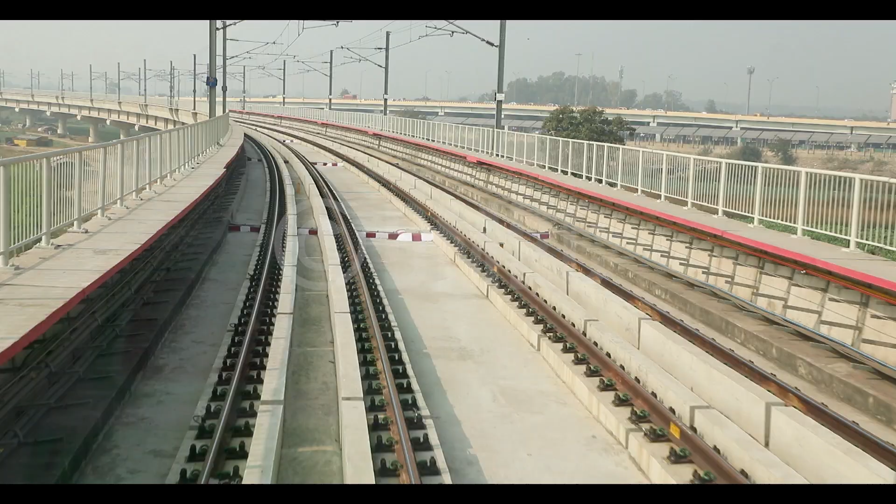Country's capital, nation's pride. Its regal past, its cosmopolitan presence, world-class ways, leisure and comfort, style and elegance. We know, we care, we are Delhi Metro.

Delhi Metro, which commenced operations in 2002, is regarded as one of the most successful urban transport systems in the world. DMRC has gained reputation as an efficient metro system developer and operator for actively playing the role of consultant for many national and international metro projects.

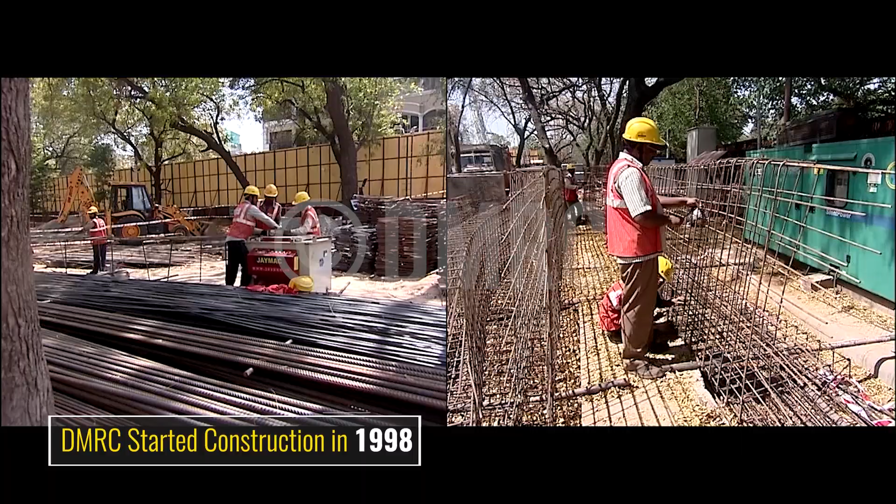Phase 1 and Phase 2 of Delhi Metro has laid the foundation of a robust mass rapid transit system in the capital, connecting all four corners of the city and a large part of NCR. The Delhi Metro started construction in 1998. The first elevated section with one line running between Shahdara and Tis Hazari on Red Line opened in 2002.

Today, it stands as the largest metro system in India, operating 12 lines covering 389 kilometers and 285 stations. This is a commendable achievement. Today, Phase 3 expansion has brought Delhi Metro on the world map and became an incredible tale of time, which has been successful in providing quality service.

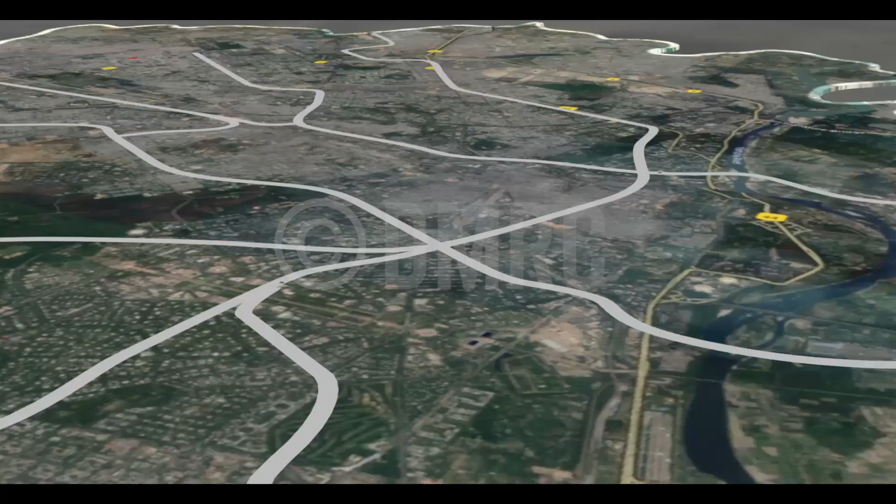Phase 3 has connected the linear corridors of the earlier phases and made the metro accessible to most of the major localities of the city and NCR as a whole. It was the toughest so far in terms of engineering challenges. It involved work on 11 different corridors with 30 mammoth tunnel boring machines and a workforce of nearly 30,000.

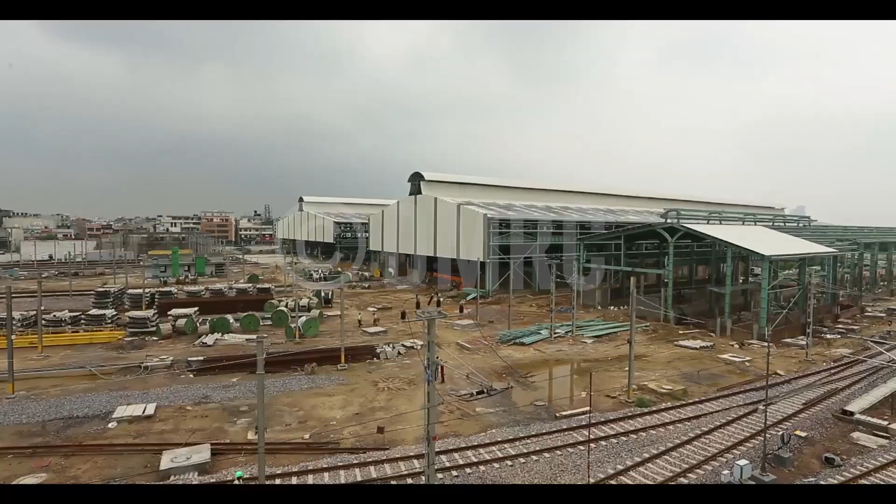Work on Delhi Metro's Phase 3 project started in 2011. It was one of the most challenging infrastructure development projects anywhere in the contemporary world. For Phase 3, DMRC not only had to dig through rocky terrain, pass through thickly populated areas and cross over flyovers, underpasses and railway tracks, but also cross the hurdle of its own existing elevated network.

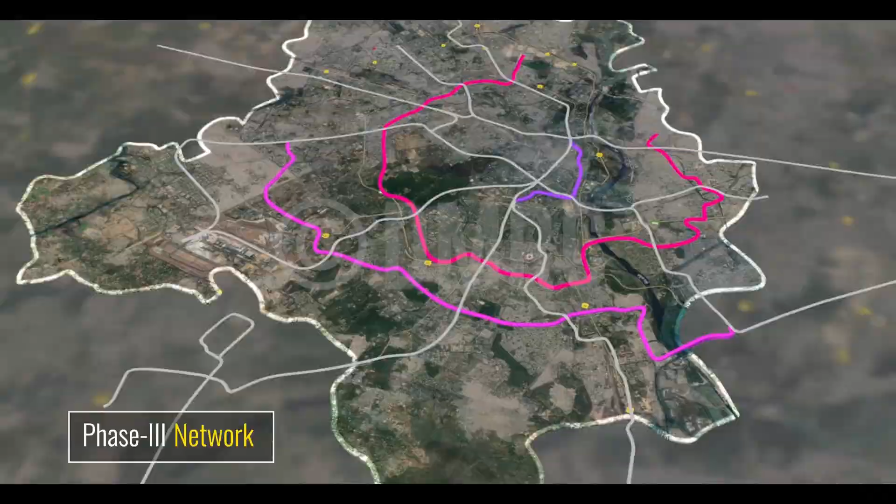Major civil engineering challenges that were encountered during the construction of the third phase of expansion were on these three corridors: Central Secretariat to Kashmiri Gate, Violet Line; Janakpuri West to Botanical Garden, Magenta Line; and Majlis Park to Shiv Vihar, the Pink Line.

Violet Line, or the Heritage Line, corridor of Phase 3 is an extension of Line 6 from Central Secretariat to Badarpur, with interchange facilities at Mandi House Station for Line 3 and Kashmiri Gate Station for Line 1 and Line 2. The Kashmiri Gate Metro Station is the interchange station connecting Violet Line with Red and Yellow Lines of the network. Central Secretariat to Kashmiri Gate corridor was one of the first corridors of Phase 3 on which work began in May 2011, and it is a completely underground section.

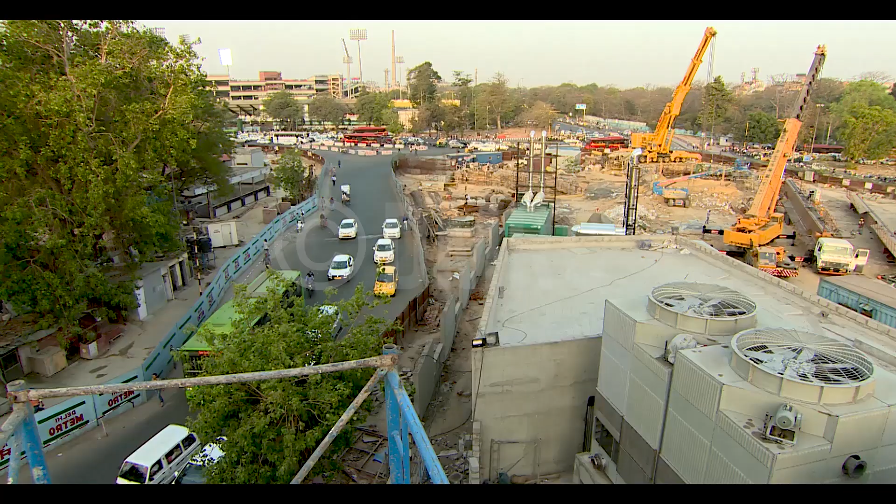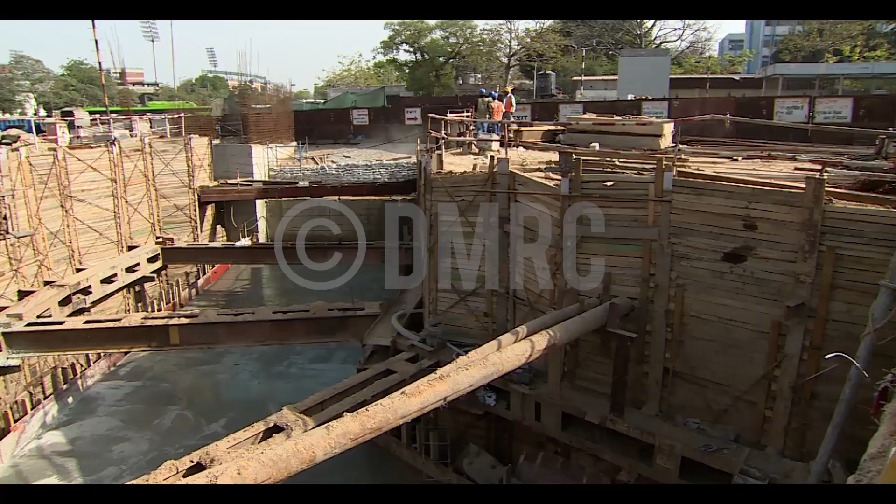As soon as construction work started on Heritage Line, many complexities surfaced which tested the abilities of engineers. But the DMRC engineers were prepared to tackle them one after another. The engineers encountered their first challenge on the ITO Delhi Gate section. It was the presence of the 16th century historical monument Khuni Darwaza, constructed by Sher Shah Suri, the then ruler of Delhi. On the ITO Delhi Gate section, construction was underway in full swing, and DMRC was strictly following the guidelines prescribed by the National Monuments Authority, as the monument was in close proximity of the construction area.

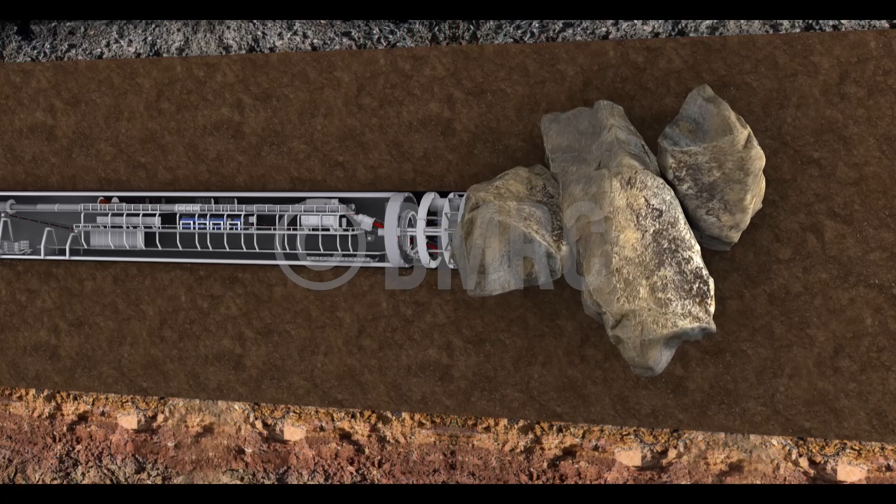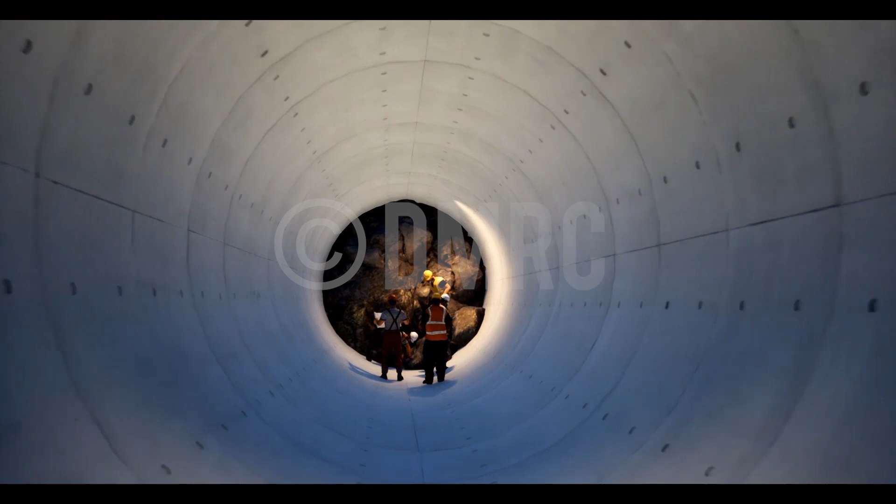Here, the TBM on the upline encountered hard rock, and it stopped as the TBM was originally designed for soft soil. Presence of such hard rock was not anticipated here. Now, it was time for the engineers to explore other solutions to overcome the situation. DMRC then employed a pipe pushing technique. In this technique, 2 pipes of 1800 dia each were inserted from the Delhi Gate shaft towards the stuck TBM. Construction workers were sent through these pipes inside the tunnel to break away the rock slowly and make way for the TBM to move forward.

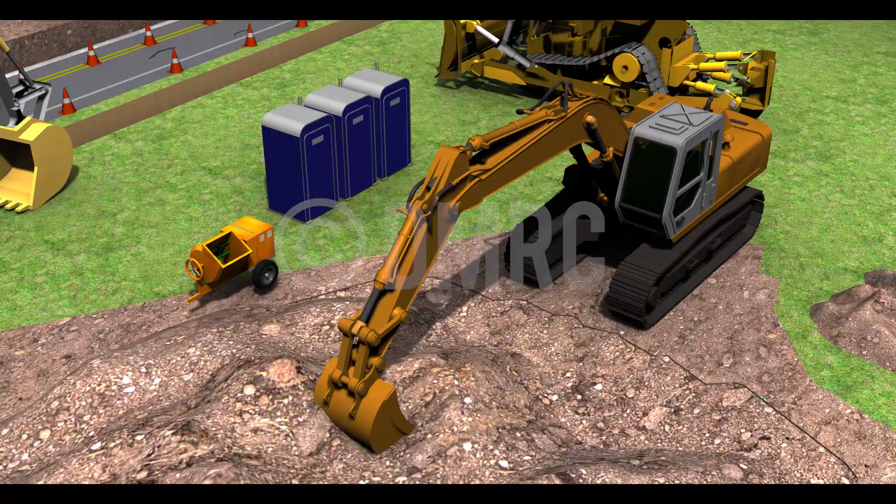Given the challenges it posed to DMRC engineers, the Delhi Gate Jama Masjid section can be called the stretch of challenges. As work proceeded on this stretch, DMRC engineers were welcomed by a major hurdle in the very beginning. On 6th July 2012, while digging earth in the Netaji Subhash Park area to construct a metro station, DMRC came across remains of some medieval era construction buried under the ground. The discovery triggered excitement among local residents, who believed the remains to belong to Akbarabadi Masjid.

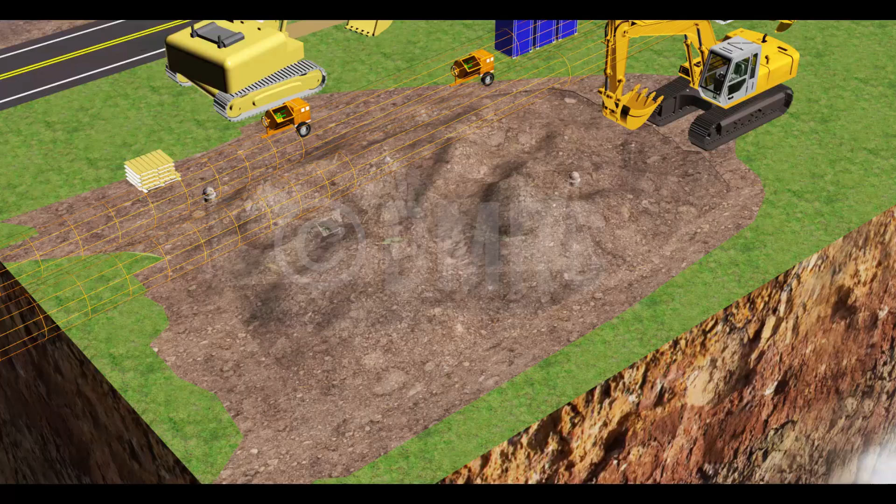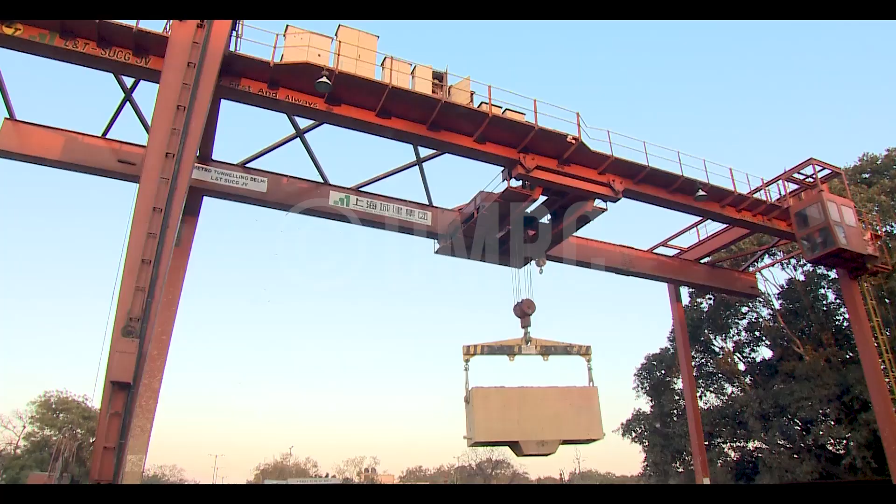Now DMRC had to fight another battle due to the change of alignment, which led to many changes in a very crucial time. The alignment had now to be shifted under the busy Netaji Subhash Marg, and a major portion of the tunnels were to be dug beneath the densely populated residential area of Daryaganj.

Shifting the alignment caused numerous unwanted problems, as the earlier alignment was passing under a non-residential stretch of open space. DMRC engineers did not have access to the ground because the area was densely populated and housed very old buildings and structures, mostly in dilapidated conditions.

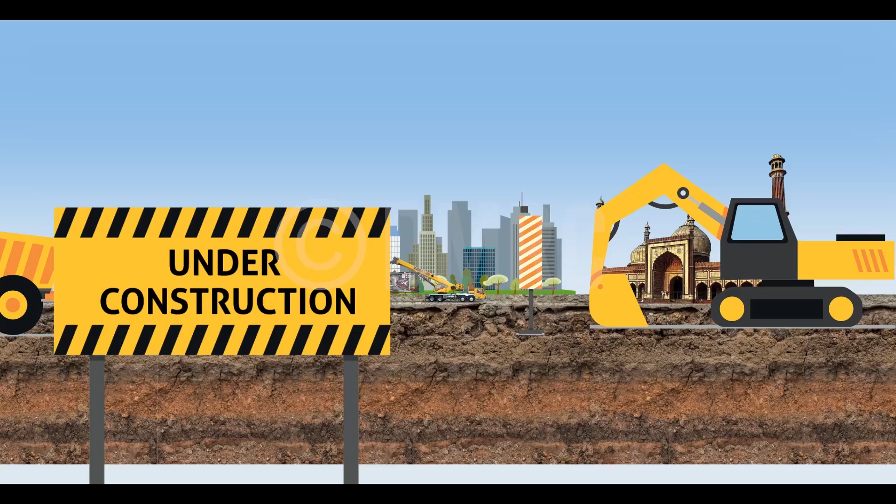The Delhi Gate Jama Masjid stretch is not only known for challenges but also for extraordinary feats. One such feat was achieved when the complete TBM assembly was done at one go inside the tunnel for the upline. It was a 96 meters long, completely assembled underground tunnel boring machine or TBM. This was the longest TBM ever used in the Delhi Metro project and weighed approximately 500 tons.

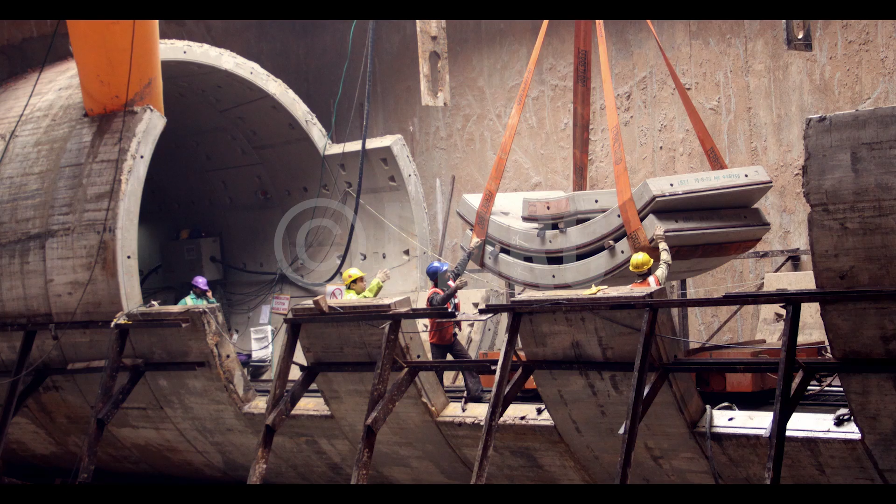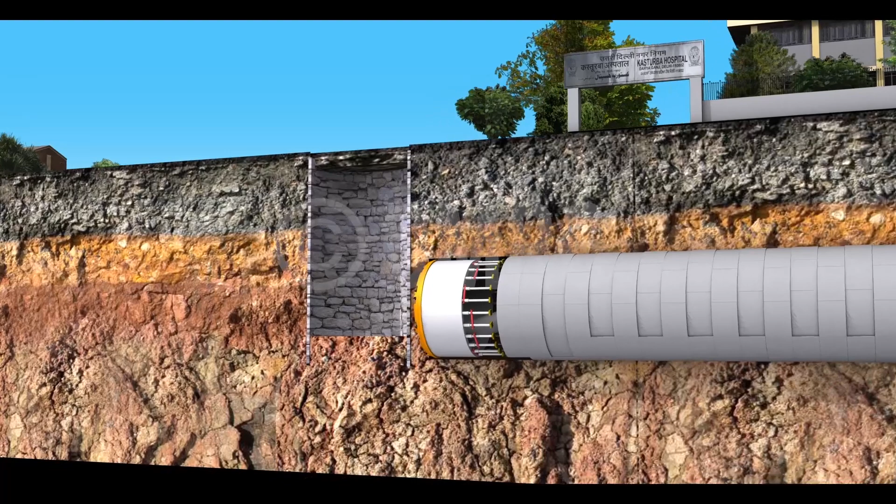The first tunneling obstacle of Phase 3 was also witnessed with this TBM. The TBM initially encountered hard rock, but after 35 rings had been completed, the TBM encountered an old well adjacent to Kasturba Hospital in October 2013. This sudden change in ground parameters and settlement values led to a chimney-like formation, which led to a 172 cubic meter cavity from the ground level. DMRC engineers acted quickly, and this issue was resolved within 24 hours.

But after crossing the hospital, the TBM stopped as its bearings failed. Once a TBM gets stuck in such a scenario, it is extremely difficult to move it. The only way to retrieve it is to make a shaft after thoroughly studying the surface.

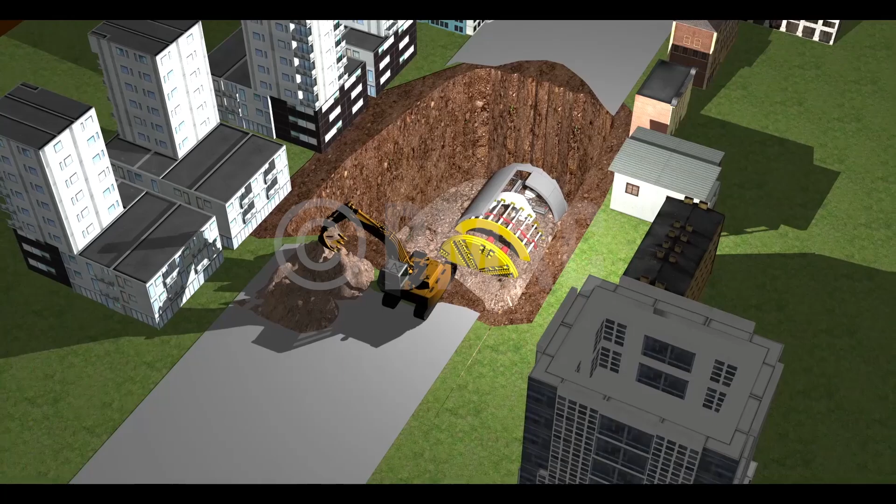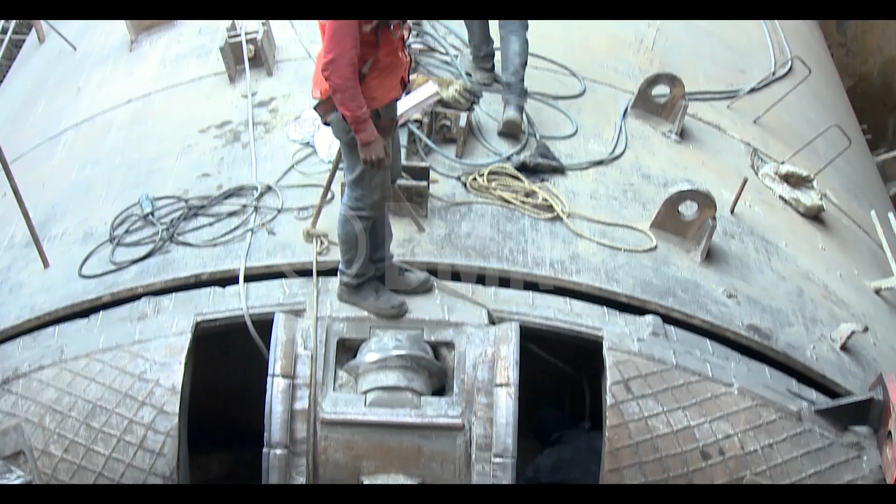During the construction work, every TBM was given a number, and everyone would recognize the TBM by its number only. The TBM-3 remained stuck at this point for almost 2 years, and the TBM-3, which was stuck on the upline, could complete around 50% tunneling. The cutter head of the TBM was badly damaged due to the rock encountered on the way. Originally, only one TBM was to be used for constructing both the tunnels, but finally, a total of 3 TBMs had to be used to complete the tunneling between Delhi Gate and Jama Masjid.

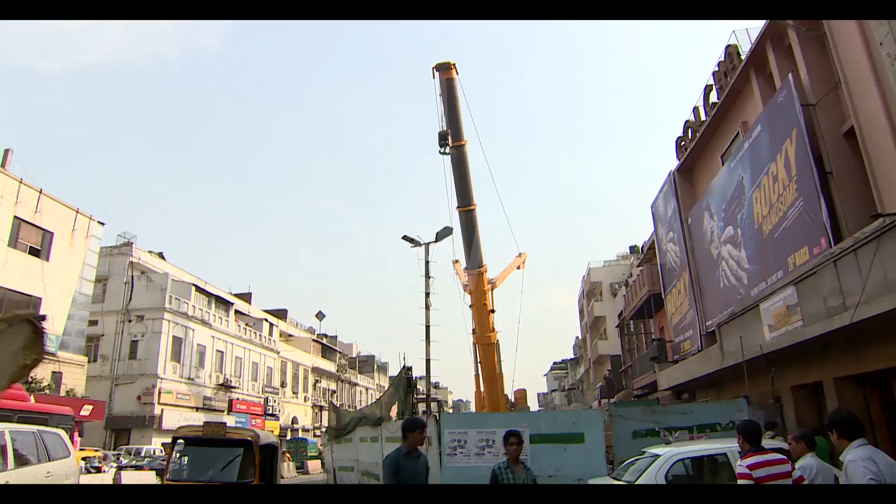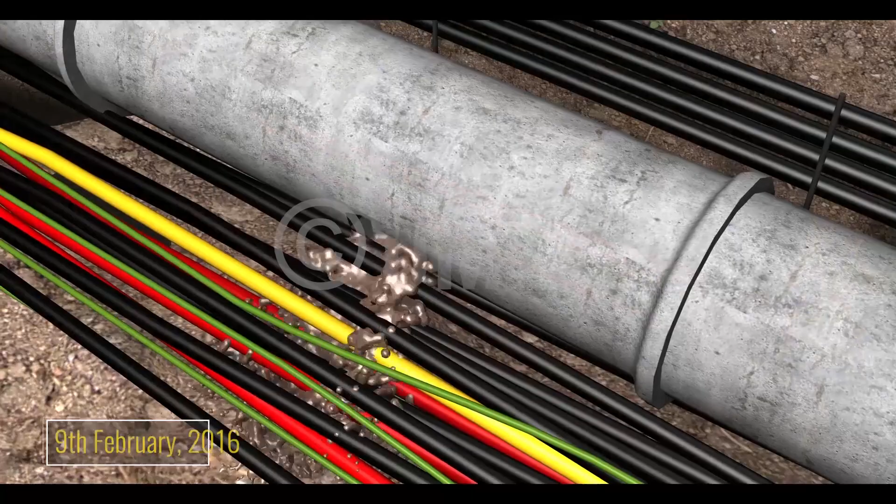Construction of the shaft near Golcha Cinema Hall was a mammoth task in itself. Golcha Cinema is located in Daryaganj, an extremely congested and heavily populated area with a large volume of traffic. DMRC had to work cautiously while digging the shaft because a lot of utilities like water lines, sewer lines and telecom lines were encountered, some of which had to be shifted to dig the shaft. On 9th February 2016, water started filling the Golcha shaft because an 1800 dia sewer line got damaged.

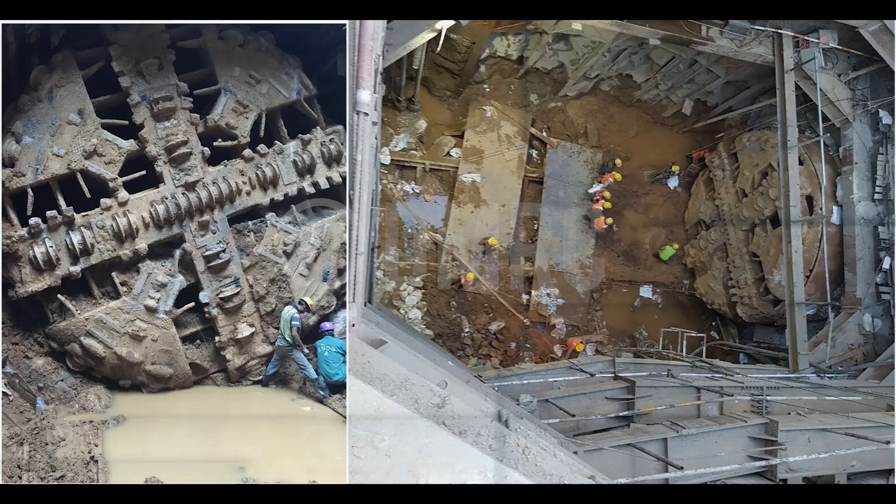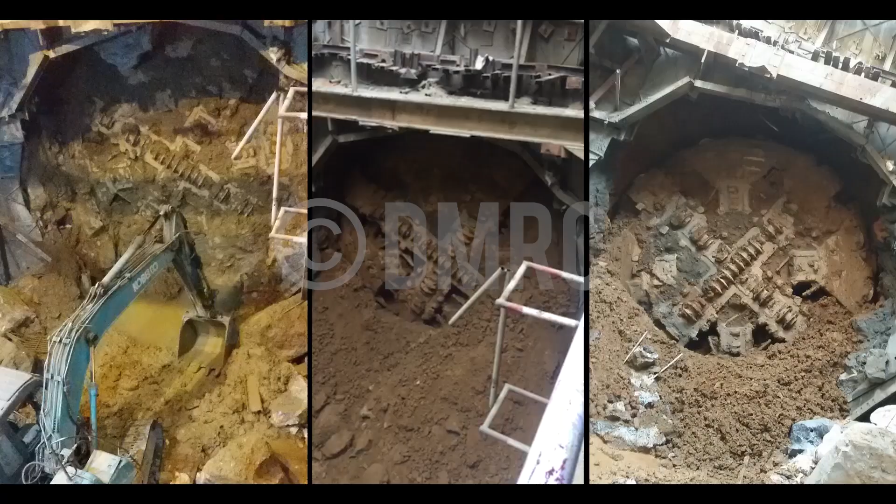But it was not the end of the challenges. Now, DMRC had to tackle a grave problem of settlement, which happened at the site in February 2016. A 500-ton crane tilted. To remove this crane, one smaller crane of 150-ton was brought. The 500-ton crane was dismantled and removed from the site, and the road was restored the same day. Finally, the tunnel breakthrough for TBM3 took place on 21st March 2016, and it was retrieved through a special shaft constructed at Golcha on 21st March 2016.

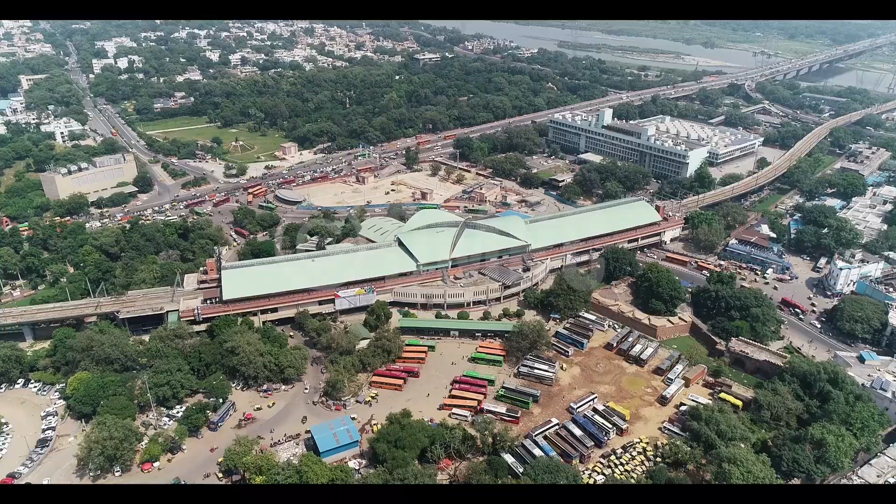The Kashmiri Gate metro station with 3 interchanges is one of the biggest interchange stations of the Delhi metro network. It is an interchange for 3 corridors, red, yellow and violet lines. The station is the first model of multimodal integration or MMI in Delhi, where 3 links connect at the concourse level. This giant station is very close to ISBT or Interstate Bus Terminal, having interstate and DTC bus stands and metro stations connecting almost every part of the city.

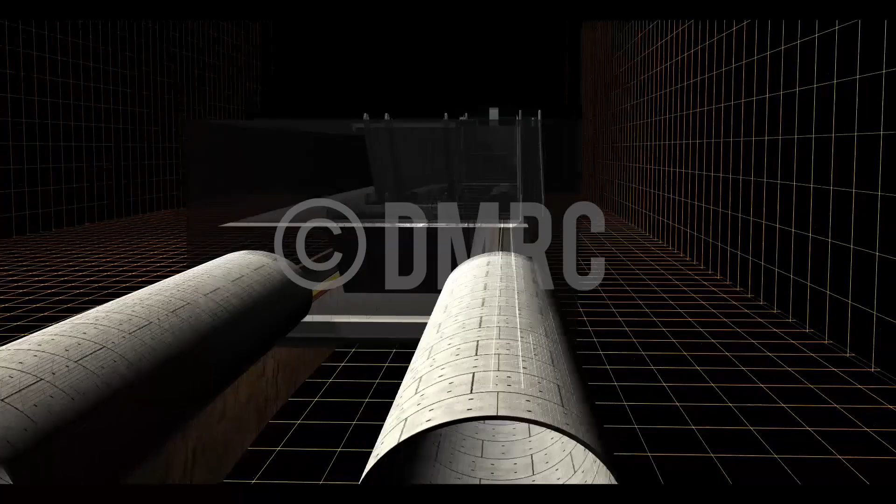The initial plan for the new station was overlapping on the existing station, and it was thus decided to shift the alignment so that the existing station would not be disturbed. The new station had to be curved at the platform level. The radius of the curve is 1000 meters, and due to this, the down line is curved while the up line is straight. Because of the same reason, the platform of the new station is also tapered. The width of the platform at the south end, that is Lal Killa side, is 14 meters, and it narrows down at the north end to 8.5 meters.

Despite having the maximum number of challenges in this stretch of Phase 3, DMRC succeeded and somehow managed to beat the odds with capable and bright leadership of the top management as well as engineers. After obtaining all necessary clearances for opening of this section, DMRC made a major foray into the walled city of the national capital as the ITO Kashmiri Gate Heritage Line was thrown open to public on 28th May 2017.

Delhi needs more metro services considering the fact that most of the population rely on metro. Hence, Delhi Metro's planning experts felt that the network was still insufficient to cater to the requirements of this ever-expanding urban agglomerate. The Janakpuri West Botanical Garden Corridor, color-coded magenta, is the Delhi Metro's new corridor along the city's outer ring road. This 38.23 km long corridor is extremely crucial from the point of view of connectivity because it covers a number of prominent landmarks along the way.

The domestic terminal of the Indira Gandhi International Airport has got metro connectivity for the first time. The corridor has 4 interchange stations in Janakpuri West, Hauz Khas, Kalkaji Mandir and Botanical Garden, which connected it with the already operational blue, yellow and violet lines of the Delhi Metro network.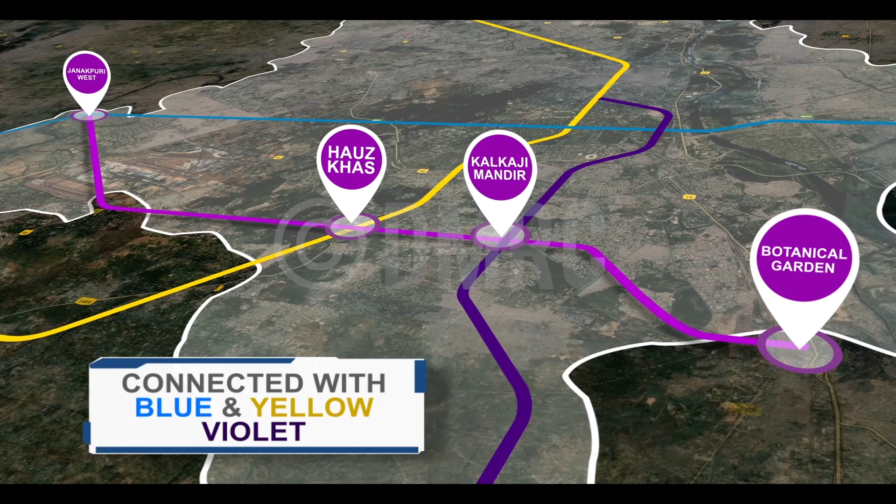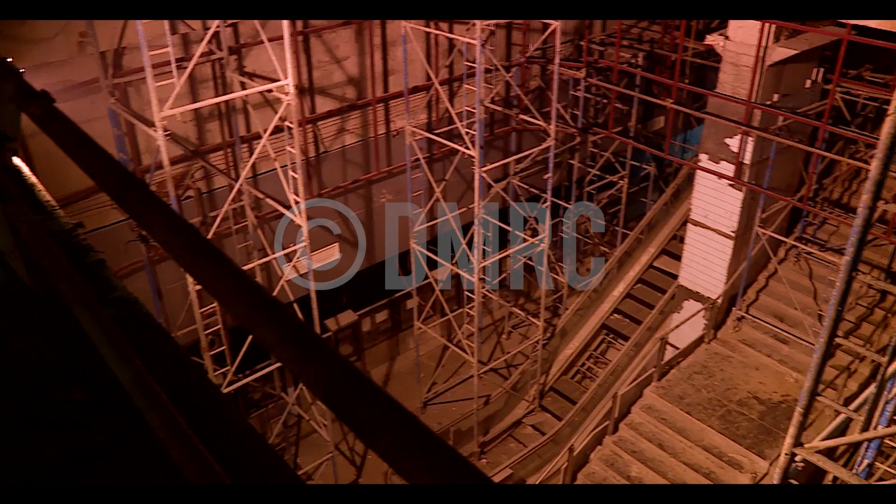During the construction of the Hauz Khas metro station, the Delhi Metro turned one of the major obstructions into an engineering wonder by creating a network of crisscross underground tunnels. And Hauz Khas was going to have interchange facility. The new tunnel had to pass below an already functional metro tunnel. And all this had to be achieved without hampering passenger services even for an hour on the yellow line. To further add to the woes was the busy outer ring road running adjacent to the construction area.

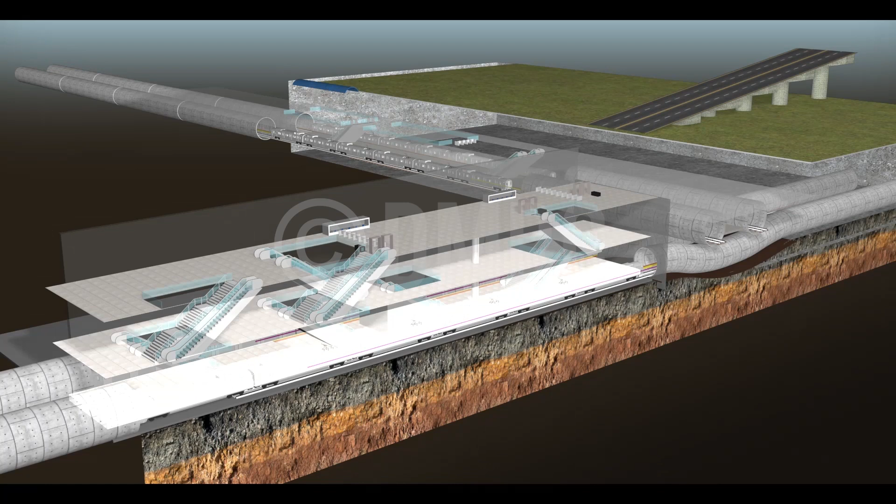The yellow line station at Hauz Khas is 17 meters deep. For the construction of the new station, it was not possible to go below the existing station, as the foundation is 32 meters deep. And there is the foundation of the flyover on Outer Ring Road as well. So, the new station has been built adjacent to the existing station at a depth of 29 meters with a length of 265 meters. It has been designed as a 5-level station: rail, platform, intermediate, concourse. Generally, interchange stations have 3 or in some cases 4 levels only.

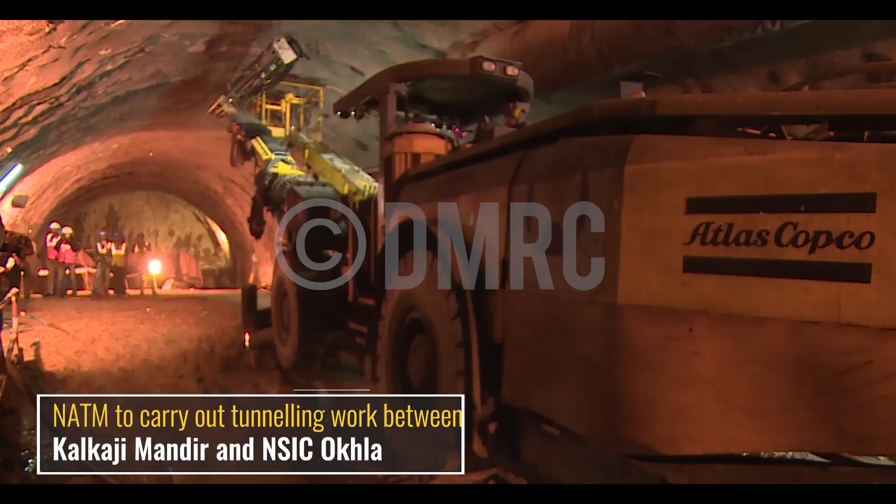Hauz Khas interchange station in many ways reflects the tremendous construction challenges that DMRC's engineers have faced in carrying out the underground construction work of Phase 3. Underground construction is always having its challenges. DMRC has used the new Austrian tunnelling method, NATM, to carry out tunnelling work between Kalkaji Mandir and NSIC Okhla on this corridor to pass below the Nehru Place to Kalkaji elevated section of the Kashmiri Gate to Raja Nahar Singh Ballabgarh Metro Corridor, the Violet Line.

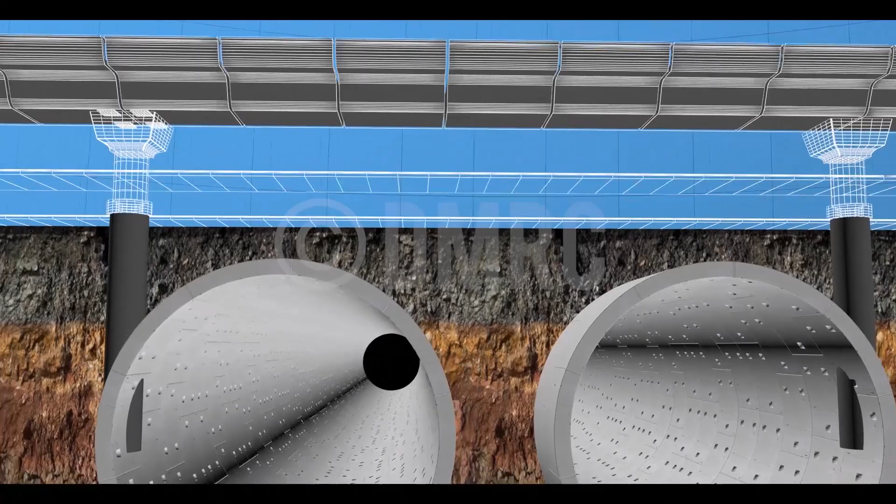The tunnel between Kalkaji Mandir and NSIC Okhla passes below piers 135 and 136 of the Violet Line. It would have been impossible to construct twin tunnels with such a short space. Therefore, a decision was taken to construct a single tube twin tunnel through which both the tracks could pass using the NATM technology.

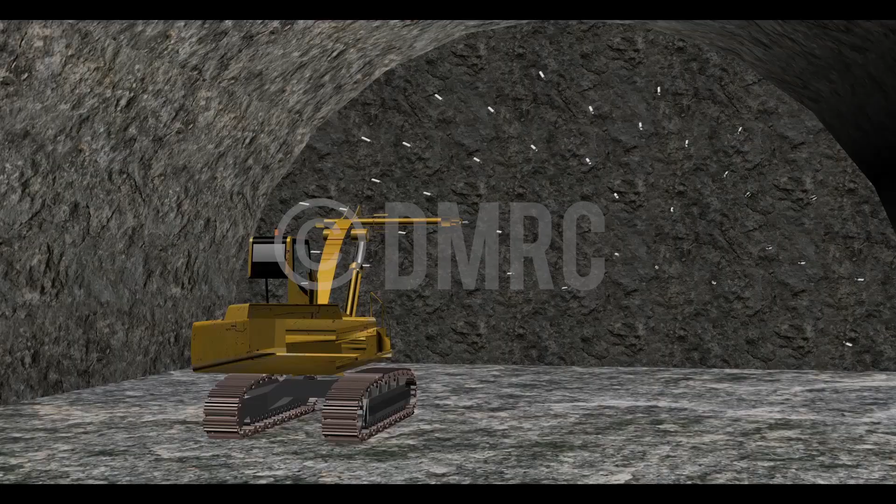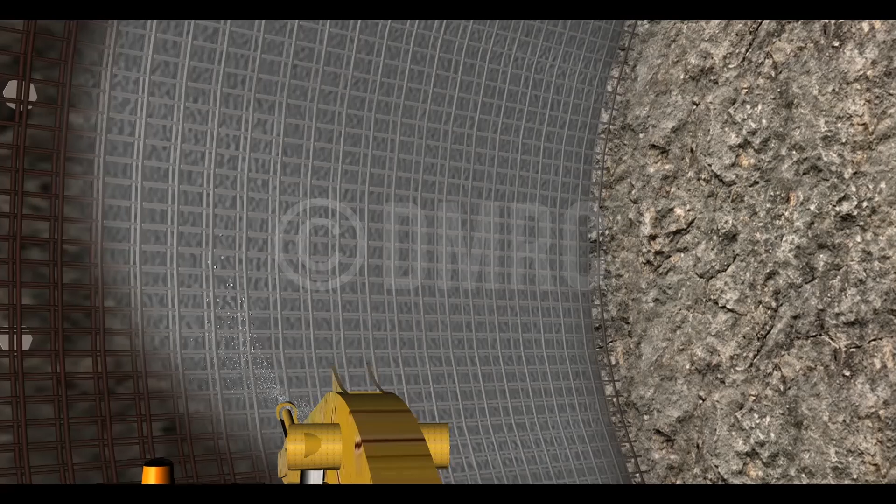NATM technology involves tunneling through mechanical excavation or controlled blasting. In this method, initially the earth is excavated and a primary lining of shotcrete, steel or lattice girders, wire mesh and rock bolts are applied for stabilization of soil as per geological strata. Here, M25 spray concrete has been used in the process. Later, a final concrete lining using M40 grade of concrete was done, which was 400 mm in depth. Delhi Metro's use of the NATM technology at Kalkaji Mandir is a classic example of intelligent tunneling by the Delhi Metro's engineers.

One of the great benefits of Delhi Metro's Phase 3 is that the domestic terminals of the Indira Gandhi Airport have also got metro connectivity, a requirement often felt by the city's domestic air passengers. The presently operational Airport Express link provides metro connectivity to the new T3 terminal of the airport, from which all international carriers and all premium domestic airlines fly. The Terminal 1 Indira Gandhi International Airport metro station is an underground station which has come up on the Janakpuri West Kalindi Kunj Botanical Garden corridor.

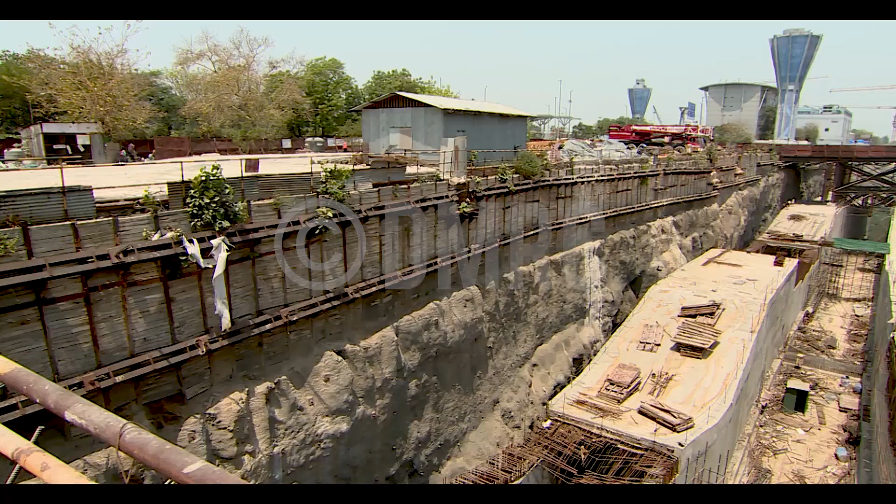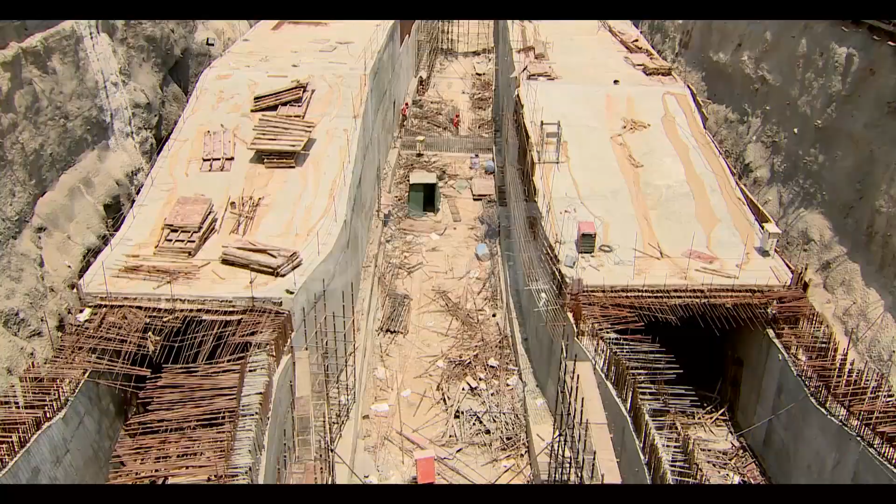DMRC's engineers encountered hard rock during the excavation for this station. However, on one side of the site was the busy Terminal 1 of the IGI airport, and on the other was the congested Mehram Nagar locality, which had a number of buildings in precarious condition. Controlled blasting was carried out at the site, and various monitoring equipment were installed to check the condition of the nearby buildings. The operations or traffic flow at the nearby airport terminal was not allowed to be hampered even for a day.

The Terminal 1 IGI Airport station also stands out for its engineering achievements. It has a number of landmarks, making it one of the most unique stations of Metro's third phase of expansion. The station box is among the longest with a length of 312.2 meters. Normally, underground stations are around 260 meters.

DMRC built a bridge on the river Yamuna with a span of 574 meters, which connects Delhi with Noida, and is one of a kind. The approximate length of this bridge is about 574 meters. The bridge has 14 spans of 41 meters length each and 15 piers. This bridge has come up about 85 meters downstream of the existing Okhla Barrage over the river Yamuna.

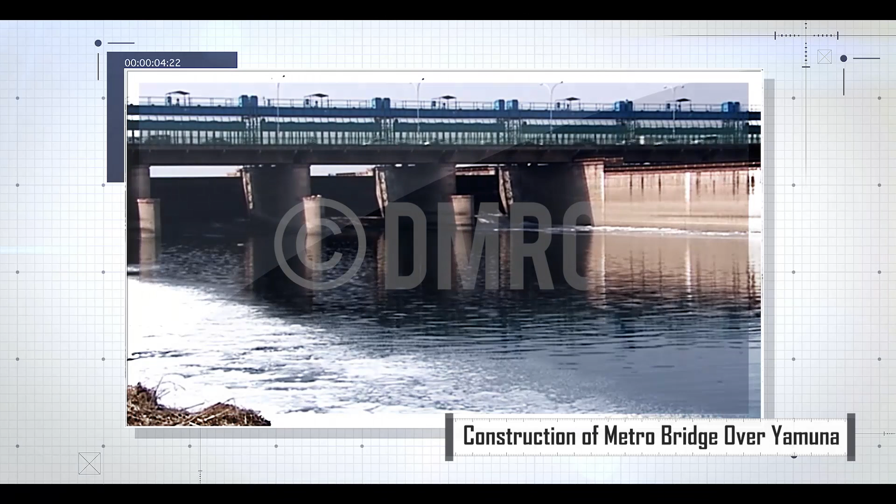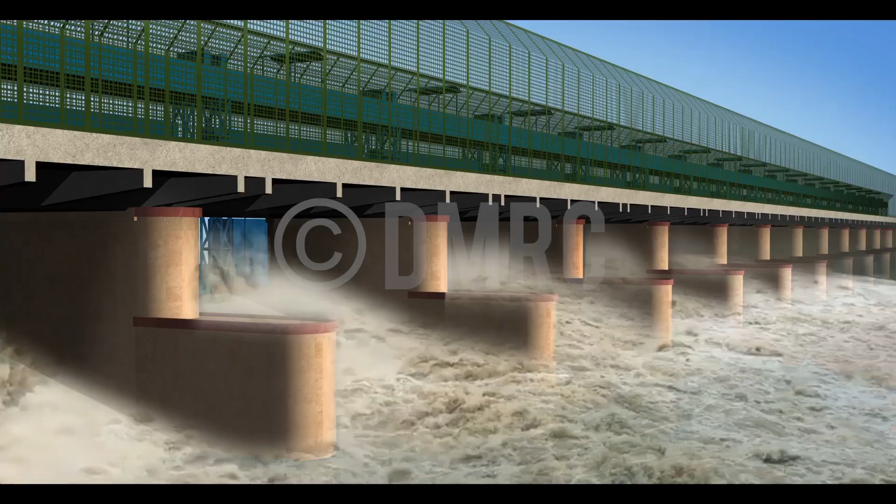During monsoons, due to rising water levels, it was very difficult to carry on with the construction, and substantial work could be done only during the dry months. During construction work, on many occasions, water was released from the barrage at short notice, leaving DMRC with very little time to wrap up work there. Within hours, all workers and heavy equipment had to be removed from the site as water would start rising following the release from the barrage. This caused substantial loss of man-hours.

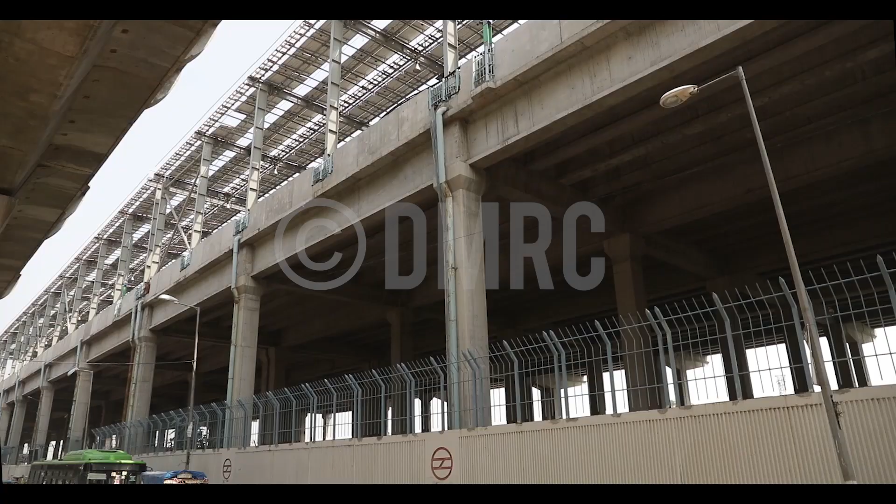About 22.5 hectares of land was requisitioned for the construction of the depot, out of which only about 50% could become available. A 1.3 kilometer long and 30 to 40 meters wide deck for stabling lines has been constructed at Jasola Vihar near Kalindi Kunj on an elevated deck, about 13 to 14 meters from the ground, where the trains operating on this section are stabled.

The Pink Line, that is Line 7, was constructed as part of the Delhi Metro Phase 3 network. It consists of 38 metro stations from Majlis Park to Shiv Vihar, out of which 12 stations are underground and 26 stations are elevated. The Pink Line, with a length of 59 kilometers, is the longest individual line in Delhi Metro.

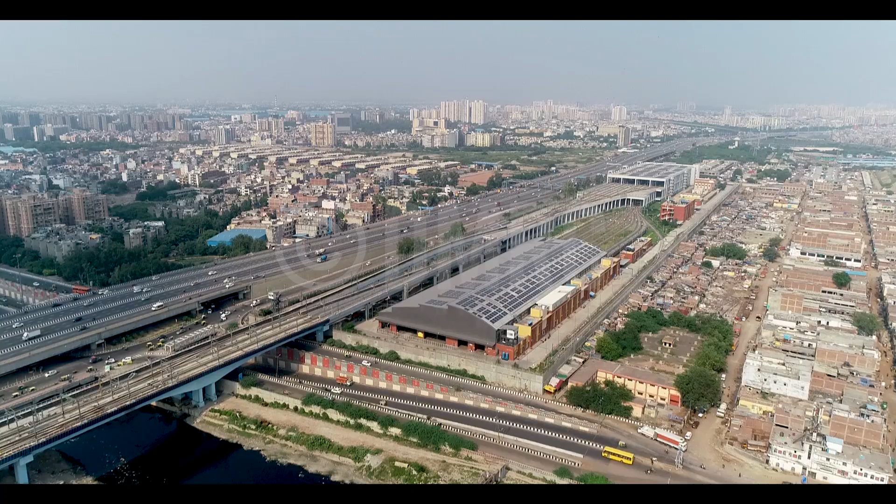DMRC has proven itself by beating every challenge over time, and one such example is the Vinod Nagar depot, where DMRC again proved its competence. DMRC's Vinod Nagar depot is the first depot in India constructed as a double-story depot. This depot is equipped with 4 inspection bay lines, 2 workshop lines, a depot control center and test tracks.

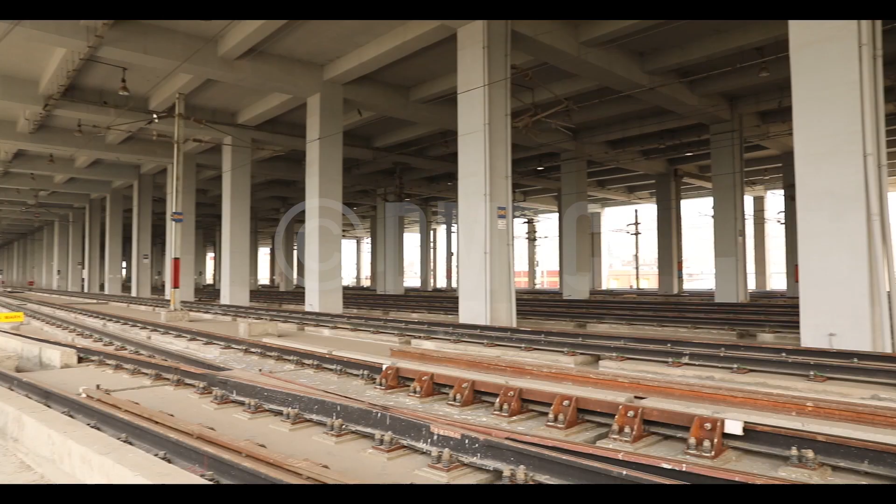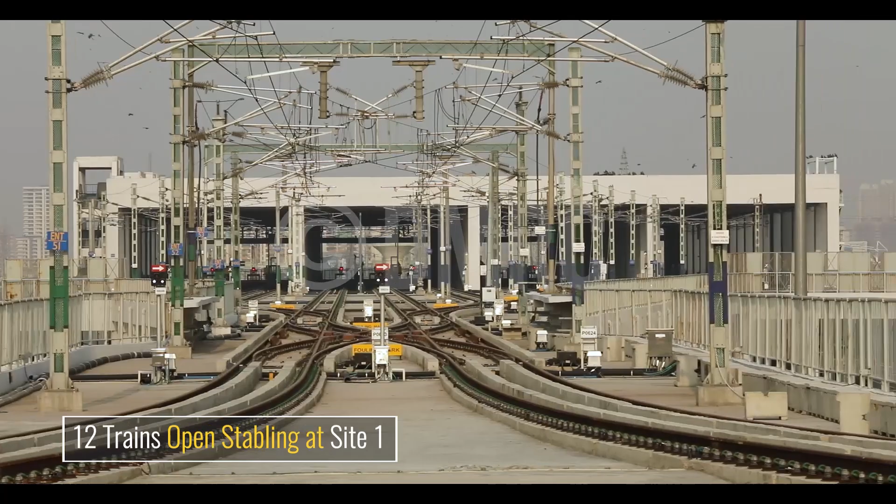Site 2 is planned at 2 levels, partly low level and partly at higher ground level. Inspection bay lines or IBL and a workshop have been constructed on the upper ground level. 32 train stabling facilities have been provided in the depot. Facilities for 12 trains open stabling at Site 1 and 20 trains covered stabling in double deck have been provided.

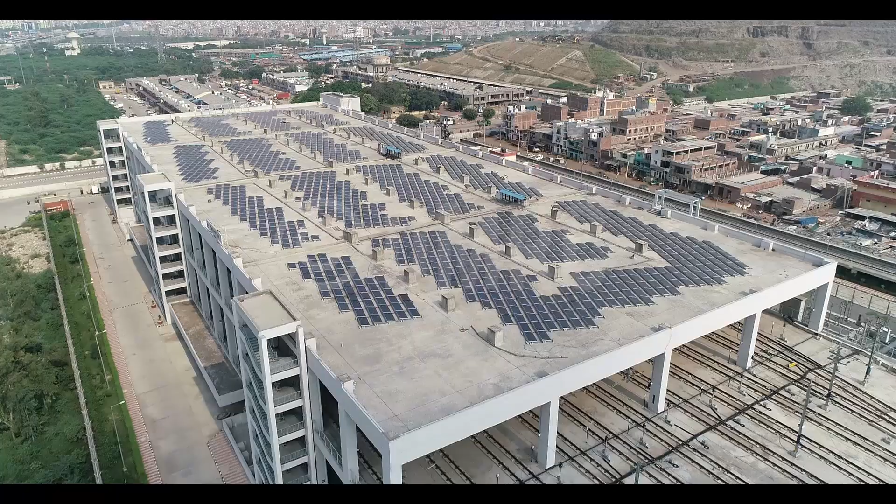The lower deck has been provided with 9 stabling lines and 2 shunting necks. The upper deck has been provided with 11 stabling lines. Double deck stabling has been structurally designed with 4 floors for future property development above the building. Stilt has been provided for 600 car parking provision for future property development. A 652-meter test track has been designed partly on a structure and partly on earth.

DMRC reached its highest point so far at 23.6 meters. It crosses over the existing alignment of the Airport Express line at Dhaula Kuan. The height of the viaduct at Dhaula Kuan is 23.6 meters and it is the highest point of Delhi Metro so far, surpassing Karkarduma, where the metro passes at a height of 19 meters above the ground.

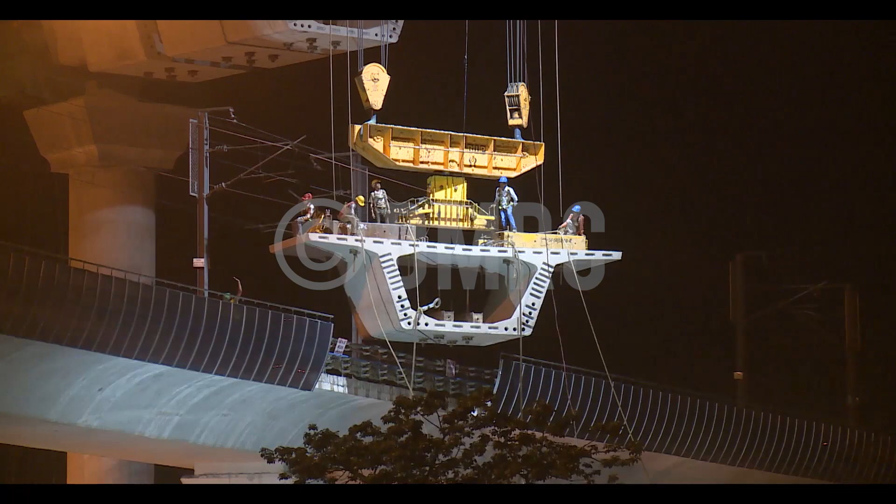The design team of DMRC also prepared the design of the viaduct after closely studying the requirement of passing over several major landmarks, such as the airport line viaduct and the flyover, at such a height. Due to the close proximity with the existing flyover and the airport line viaduct, and as the segments were to be lifted to a height of about 23 meters, a systematic methodology was planned for the erection of the segments. The segments were erected through a special 4-step method because of the extra height involved.

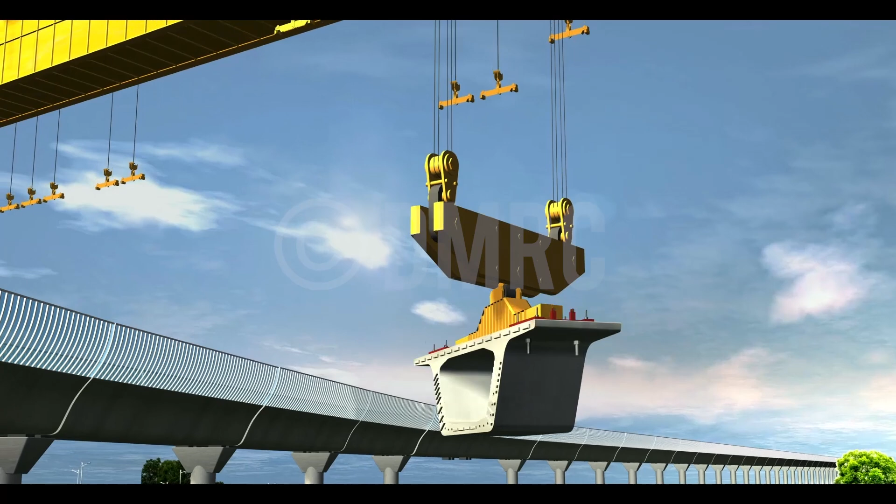Step 1. The trailer brought the segment and was parked between the already constructed piers. Step 2. The segment was lifted by an extended winch assembly having a load carrying capacity of 120 tons, whereas the maximum weight of any segment is 55 tons, and transferred to the extended Macalloy bars extended by couplers, as the normal arrangement of winch and Macalloy bars fixed to a slider can launch the segment only up to 15-meter height.

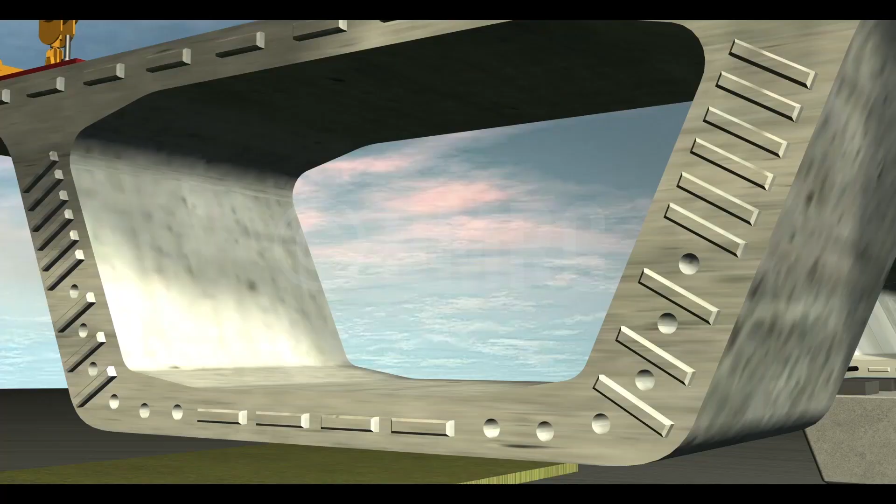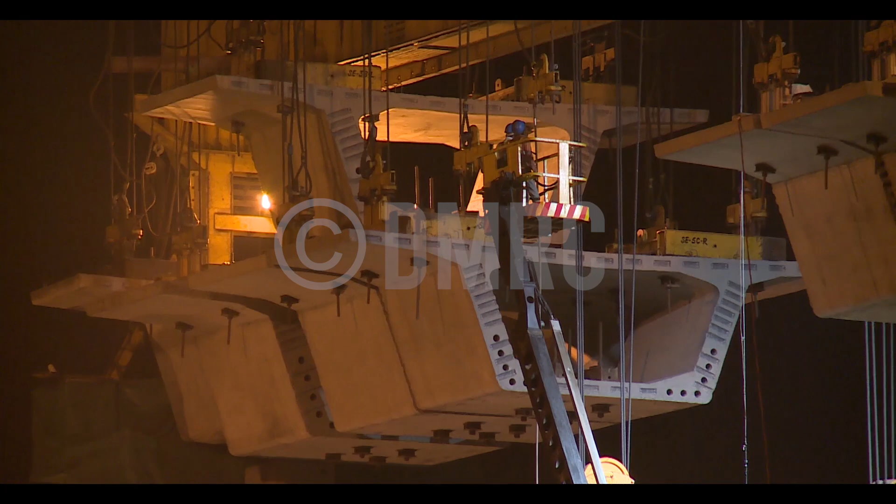Then the segment was transferred to a normal winch assembly and the extended Macalloy bar was removed and again lifted to a height so that it could be transferred to the Macalloy bars fixed to the slider. Step 3. The segment was rotated and attached with a segment trolley or slider using 40mm dia Macalloy bars having a capacity of 129 tons. Step 4. The segment trolley or slider was pushed to one end of the pier where it was erected through a segment launcher. Then the gluing of the segments was carried out, followed by stressing.

Majlis Park is the first station of the Pink Corridor, which is the longest individual corridor of Delhi Metro. The tunnelling between Majlis Park and Azadpur was quite challenging. After completing 580 rings from Azadpur towards the Majlis Park ramp at a depth of 21 meters at their low point, tunnel boring machines engaged to make the 1.4 kilometer long tunnel encountered unexpected ground conditions while tunnelling in this stretch. The unexpected ground conditions damaged the cutter heads of both the TBMs.

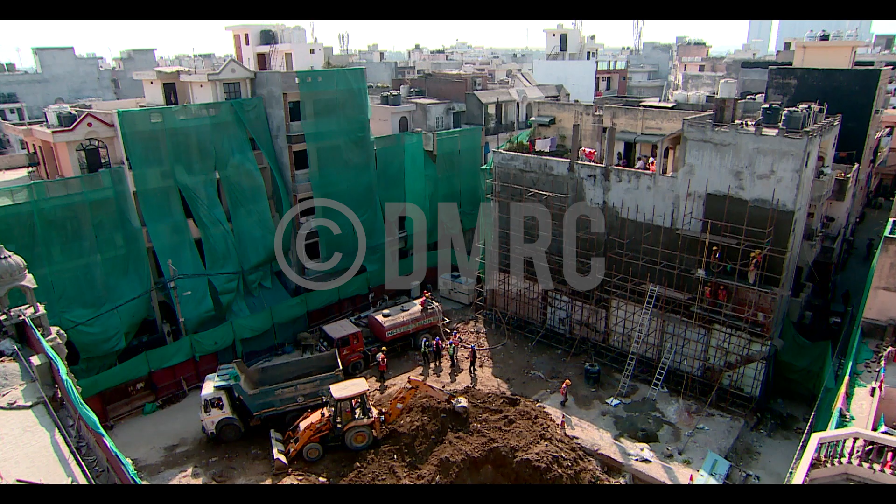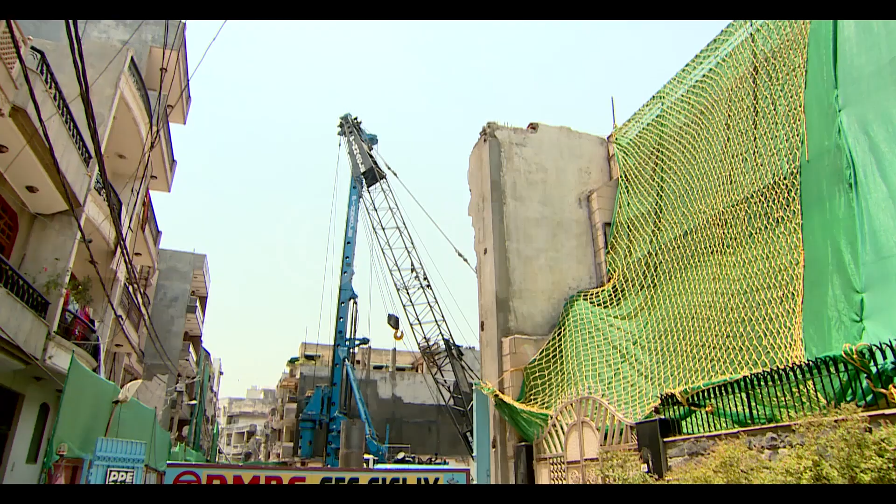Thus, an emergency shaft had to be made midway to retrieve the TBMs in the densely populated colony of North Delhi. Land on the surface to build the shaft was not available, as this area had a number of private residents and a Gurudwara. Under these circumstances, DMRC took a decision to retrieve the TBMs instead of changing the cutter heads, and for this purpose, 2 houses of 110 square meter area each and another structure of 400 square meter were taken to make the retrieval shaft. Once the residents were relocated to an alternate location and the land was acquired from the concerned owners, the demolition work began.

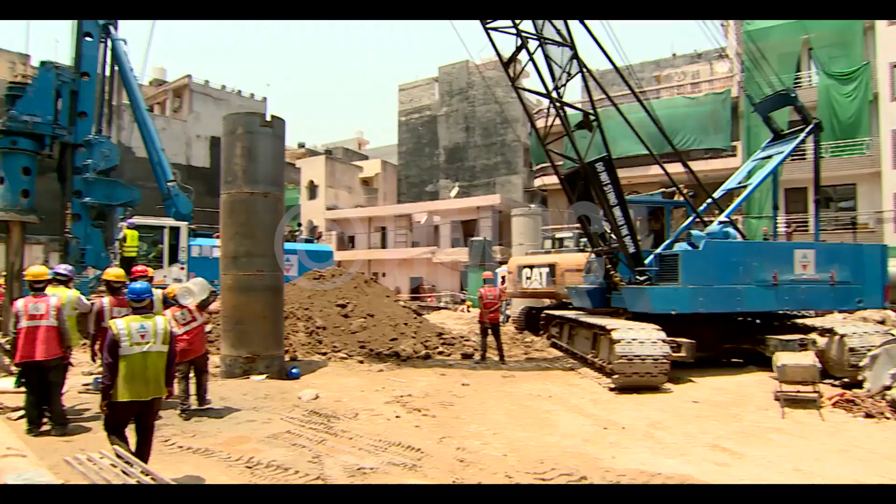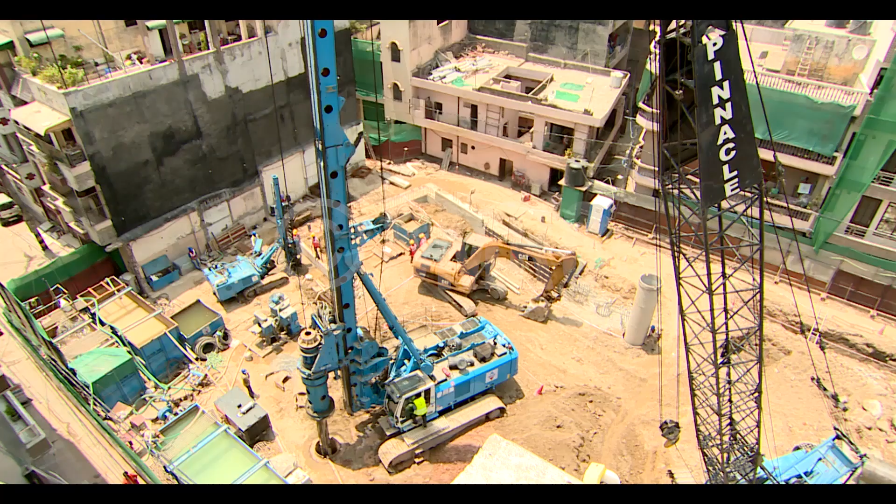The rescue shaft was designed with secant piles, which were placed in the periphery of the shaft. Secant pile is a continuous series of primary or plain and secondary or reinforced piles. Primary piles are installed first, with secondary piles constructed in between primary piles with an overlap of 200 mm on each side. During the boring of piles, surrounding buildings were closely monitored by soil settlement markers, building settlement points, extensometer, real-time online monitoring, etc.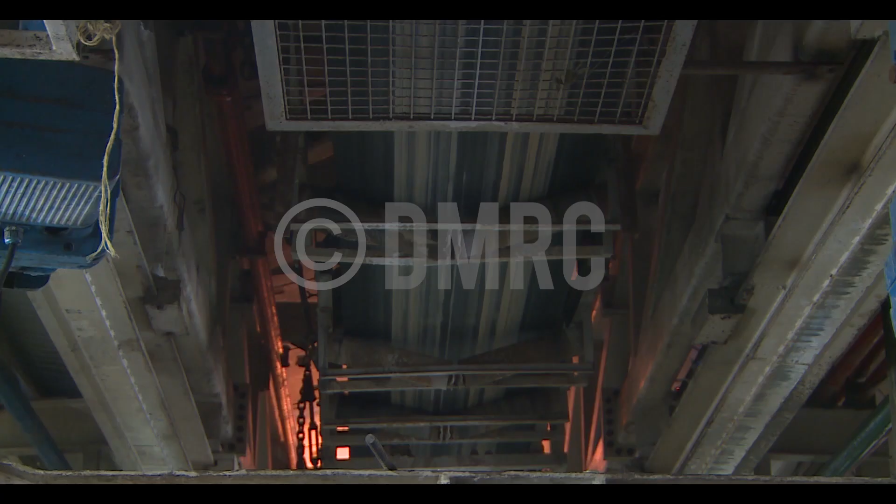Meanwhile, 2 rock TBMs were started from the Majlis Park side towards Azadpur, so that the tunnelling process could be completed in this section. After completing the tunnelling process, these TBMs were also retrieved from the same shaft at Rameshwar Nagar.

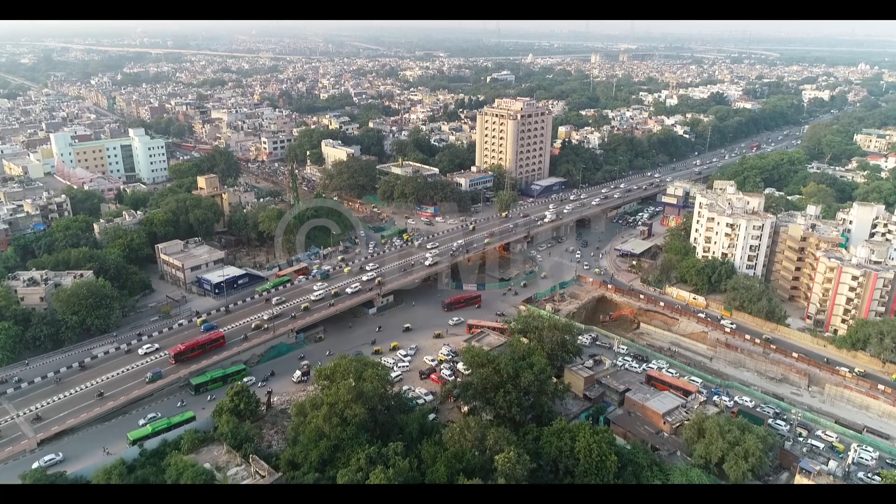With a size of just 151.6 meters against an average of 265 meters, Ashram Station is one of the smallest metro stations in the world. This underground station is located at the center of one of the busiest intersections in the city, and DMRC had to fight several land acquisition battles. The long-lasting legal battle forced the designers to come up with a station design that took just 151.6 meters of space against the average of 265 meters.

Since the private land could not be acquired, the DMRC had to reduce the station space by almost half the average size. DMRC architects and engineers, for the first time, completely redesigned the underground station, utilizing all 3 levels, that is, the mezzanine, concourse and platform, to accommodate all the essential equipment which are generally placed only at concourse and platform levels of underground stations.

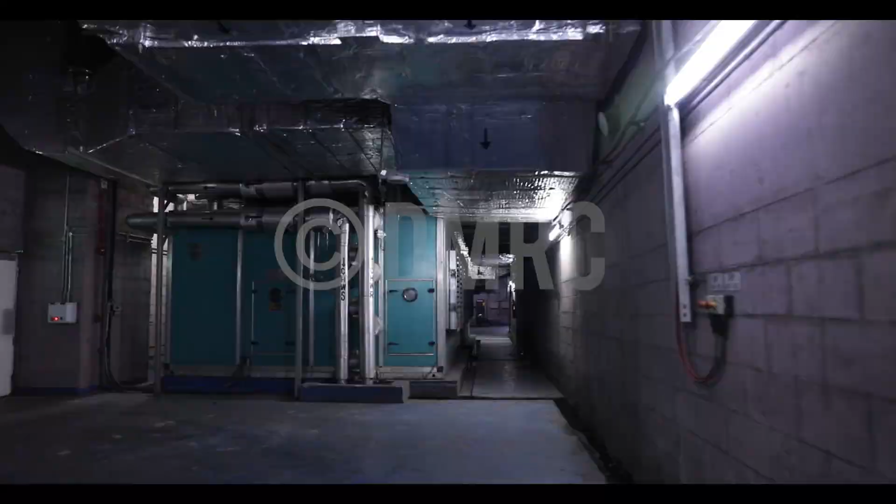This was done by reducing the length of the platform, relocating ticket counters and automatic fare collection gates, and shifting of ancillary buildings and ventilation fan rooms vertically upwards. DMRC thus ensured that despite less space, the commuters got the same facilities and quality of service. The length of the platform for a typical 6-car train is 140 meters. At this station, the length of the platform was reduced to 135 meters, which is just enough to ensure clear 3 meters width in front of the passenger doors as well as the driver cabin door of the rolling stock.

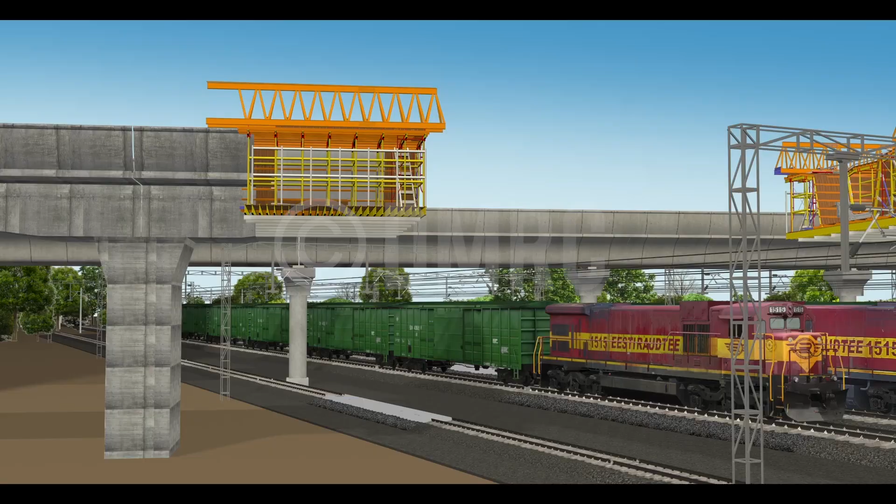The Line 7 of Delhi Metro has faced the maximum number of engineering challenges since it passed through a lot of difficult stretches and densely populated areas. One such section was the portion when the viaduct had to cross the Anand Vihar railway station of the Indian Railways, one of the busiest stations in terms of ridership and number of trains. For crossing this area of Indian Railways, 6 piers were erected in the railway compound in such a way that there was no infringement of the metro line with the railways.

DMRC has crossed the railway lines in a very safe and systematic manner, with all safety precautions in place and without affecting the daily train movement on the section, in coordination with the Indian Railways.

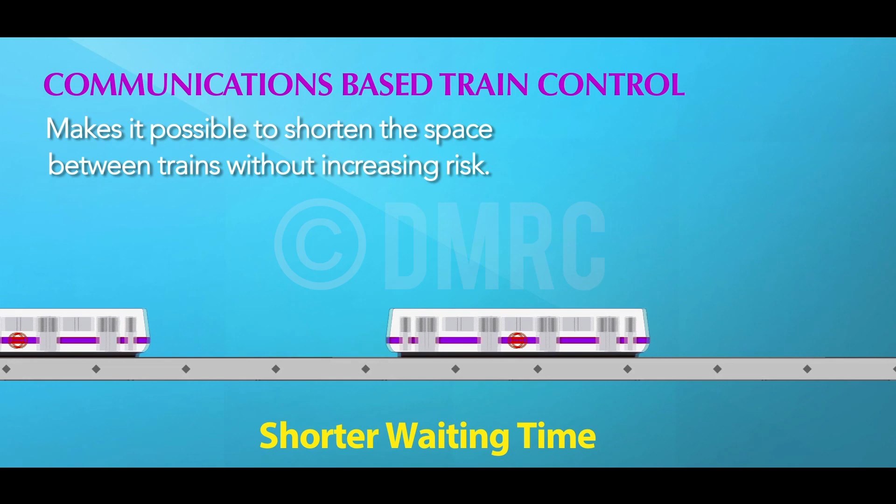The new signalling technology known as Communication-Based Train Control, or CBTC, has been implemented on this corridor after undergoing rigorous testing in stages. By means of the CBTC systems, the exact position of a train is known more accurately than with the traditional signalling systems. This results in a more efficient and safe way to manage the railway traffic.

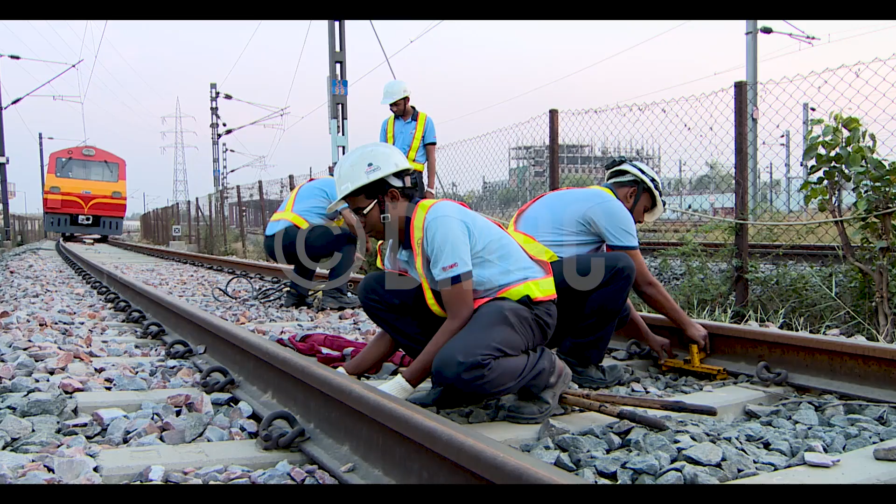Keeping the Delhi Metro running all day long without a glitch requires not only regular maintenance of trains and tracks, but also constant monitoring of the system during operational hours. The response of the train at different speeds, braking of the train, and the interconnection with the Operations Control Center, or OCC, was also monitored during the trials. The behavior of the track system and the overhead electrification, or OHE, was checked repeatedly.

Rolling stock is the most important aspect of any rail network, and the rolling stock acquired for Phase 3 was loaded with many new features, especially in its interior and exterior, from the aesthetic as well as commuter facility points of view. Delhi Metro's new UTO, that is, unattended train operation enabled trains, are now operating. The system significantly increased the level of punctuality and operational flexibility.

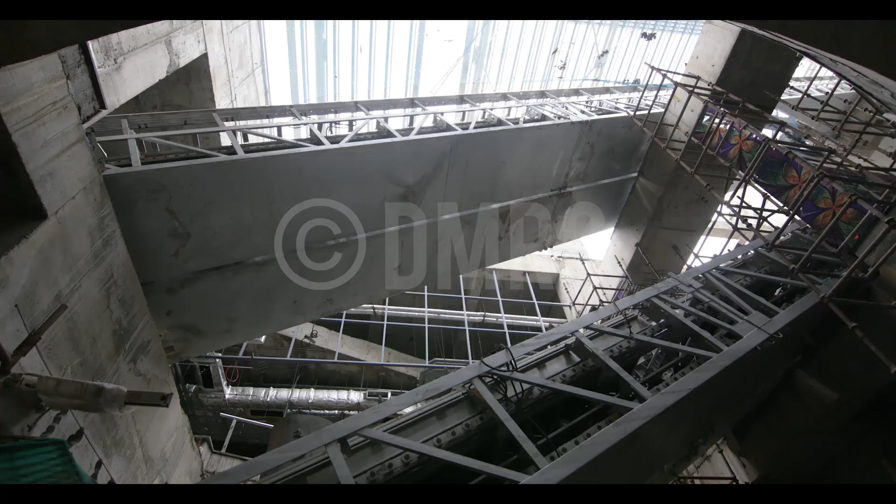The world has seen many superstructures with impressive architecture, engineering and craftsmanship, and DMRC is one of them. DMRC achieved another feat by making the escalators with the highest elevation at Janakpuri West. The height of these escalators is equal to the height of a 5-story building. It was not really easy to make, but was exciting and challenging. A 250-ton crane was specially deployed for the installation of these escalators.

The Delhi Metro network successfully connected the far-flung areas of the National Capital Region, NCR, in Phase 3 and made travelling much easier for passengers. Today, Delhi Metro stretches to Noida and Ghaziabad in the state of Uttar Pradesh, and Gurugram, Faridabad, Bahadurgarh and Ballabgarh in the state of Haryana.

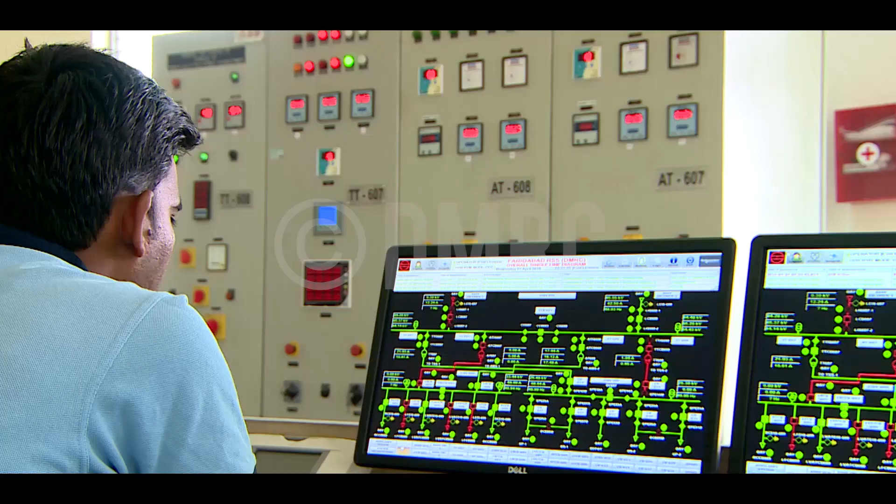In order to mitigate carbon footprints, DMRC is trying to maximize the use of renewable energy by utilizing all possible rooftops for harnessing solar energy. Till date, 32.4 megawatt capacity from rooftop solar has been commissioned in DMRC under the RESCO model.

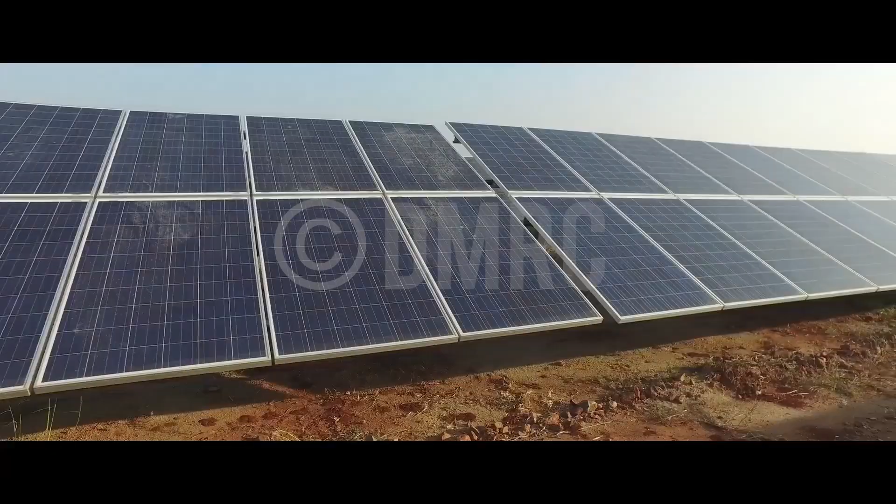After utilization of all available rooftop space, DMRC decided to procure solar power from the off-site Rewa Ultra Mega Solar Power Plant for other operational requirements. DMRC has been involved in this project from concept to commissioning stage, and the actual flow of energy to DMRC started on 18th April 2019 through interstate open access.

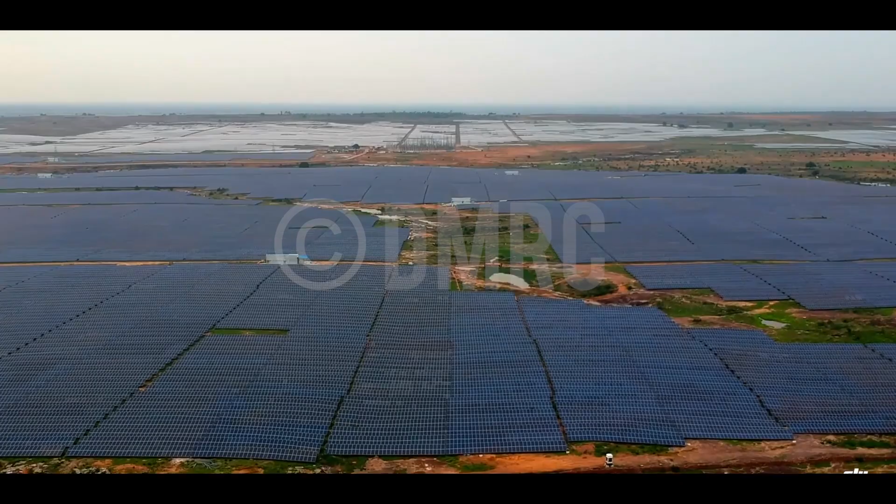Art and culture is an essential part of any society. Art is a mode of communication. DMRC is working towards promoting the rich heritage, art and culture of India through artworks, display panels and exhibits at its stations. DMRC has also tied up with various government bodies or organizations and schools, authorizing them to use the metro premises in such a way that they are treated as a hub for promotion of Indian art, culture, literature,

craft, tourism, etc. Delhi Metro's Phase 3 stations have been utilized for the portrayal of the history and heritage of the country. Various artists, including professionals and amateurs, were used to create these artworks, and different artwork was displayed at each station, which also helped to enhance the beauty of these stations.

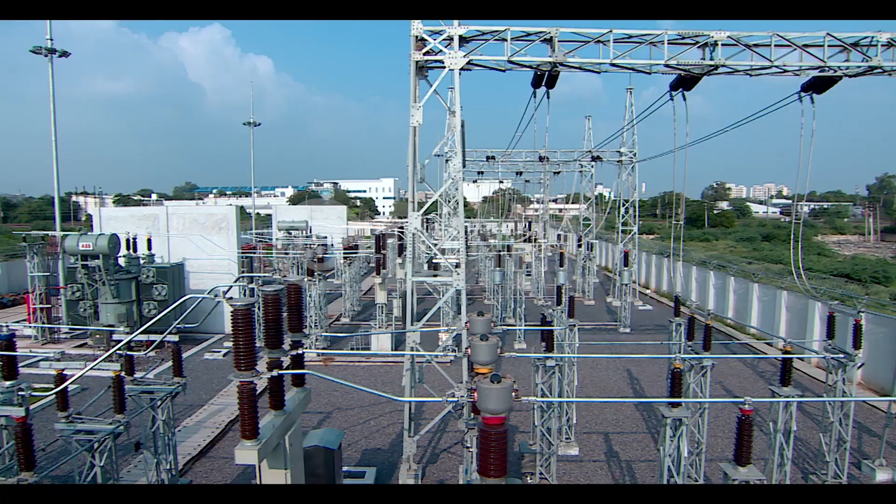Care for the environment has always been one of DMRC's priority areas. All the new metro stations in Phase 3 have been certified as Platinum by the Indian Green Building Council. These stations are designed with specific provisions for the conservation of energy as well as more CO2 saving, water saving, waste management, energy management and optimized building design to reduce the size of the station box and hence lesser use of construction materials.

Delhi Metro has been meeting the expectations of the passengers for the last several years, and Delhi Metro is on the path of setting new records, touching new heights and moving towards its destination by easing all the difficulties and challenges without any halt.

DMRC has got a very unique type of experience, where DMRC develops the system, then operates it, uses this experience in further development, and then improves in succession from Phase 1 to Phase 2 and then Phase 3 and now Phase 4. This type of experience, I think, nobody in the world has got.